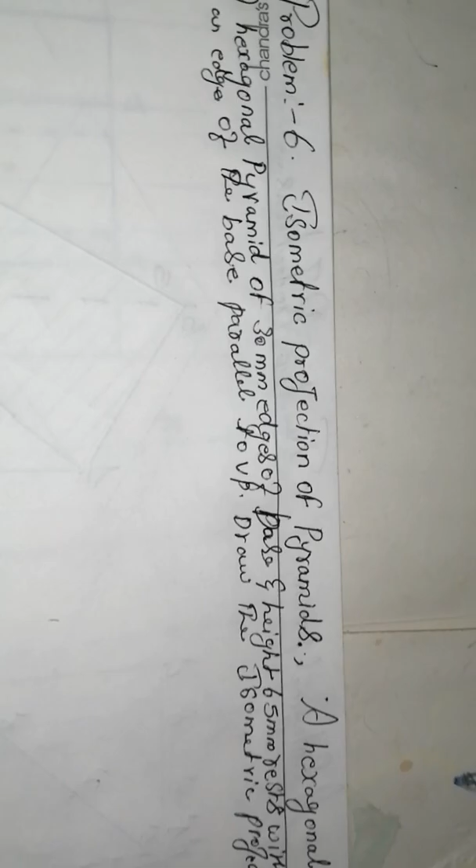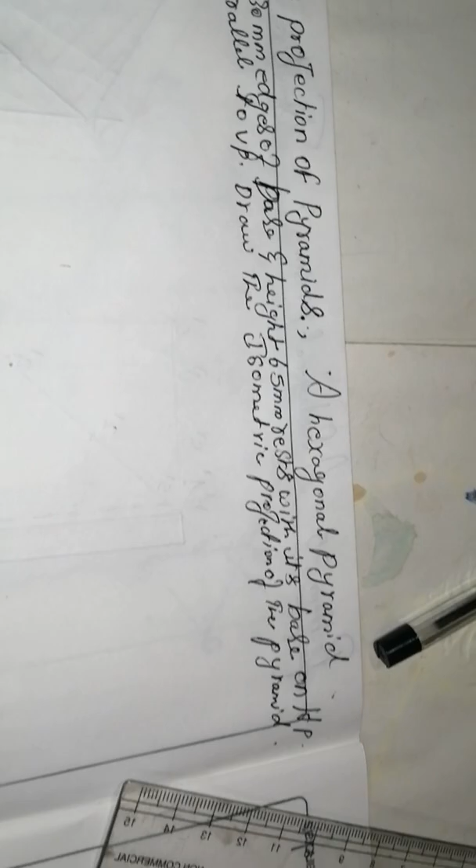So the question has been given like this. We have to do an isometric projection of a pyramid. The question has given a hexagonal pyramid of 30 mm edge of base and height 65 mm, resting with the base on HP and an edge of the base parallel to VP. Draw an isometric projection of the pyramid.

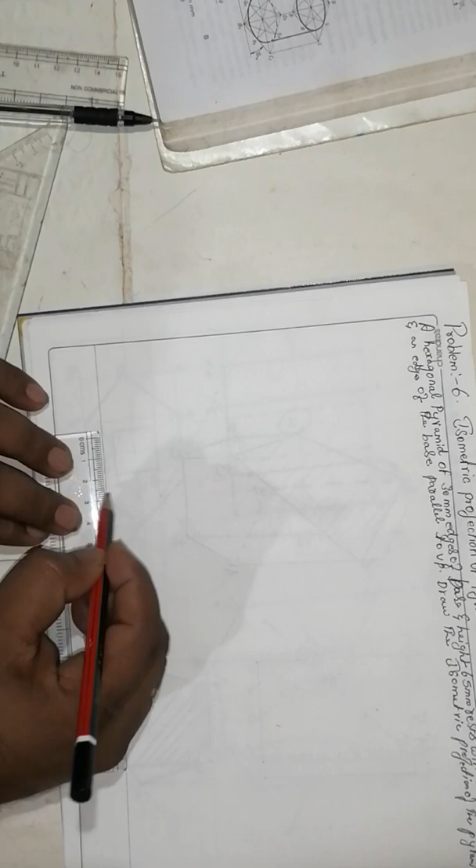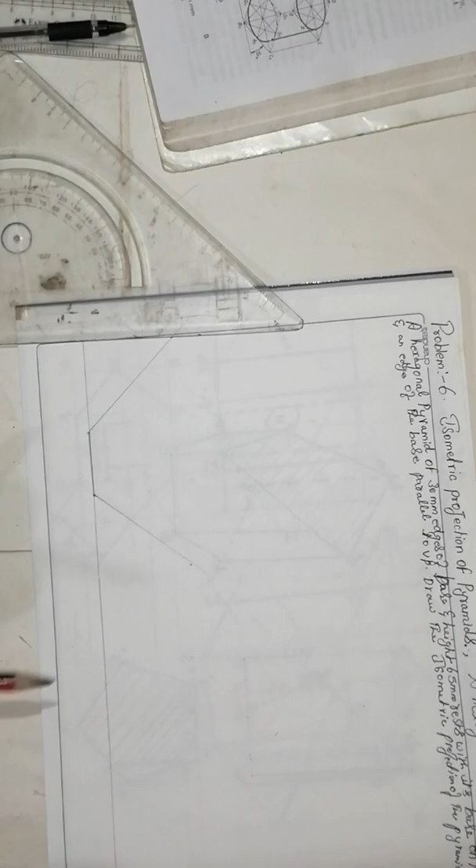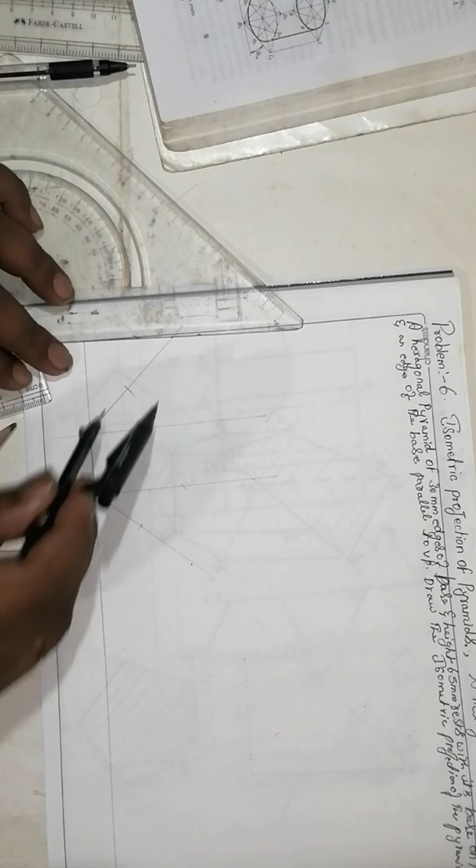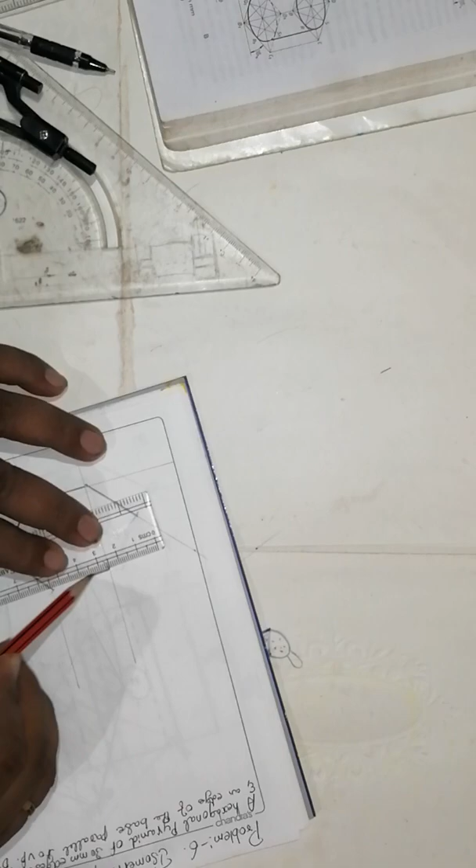So after that, using a compass, cut here 30 mm and cut here 30 mm. Take here, cut here, take here and cut here. So make a hexagonal pyramid so that the pyramid will come like this. So your pyramid will come like this. Then name this part.

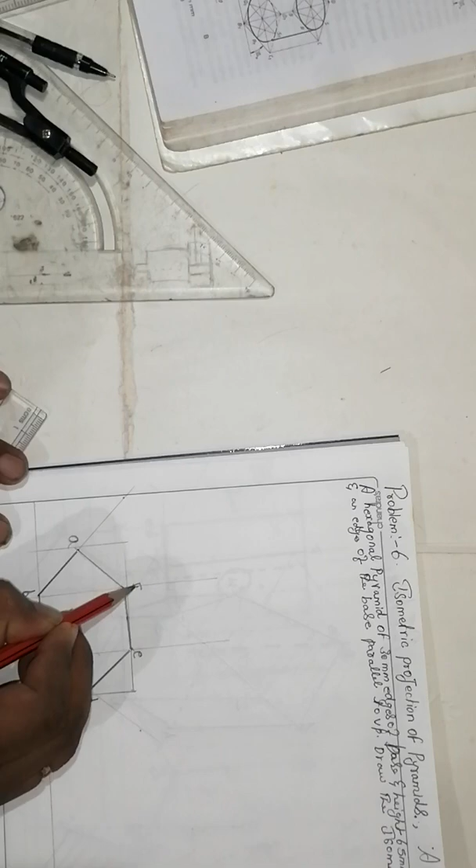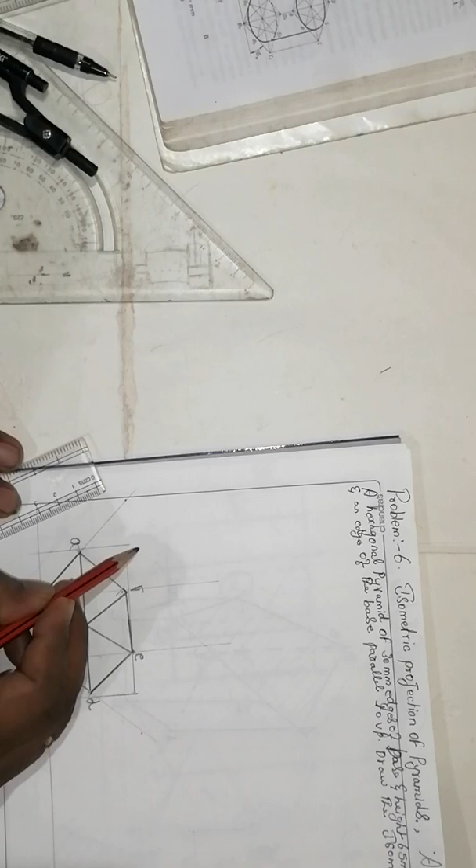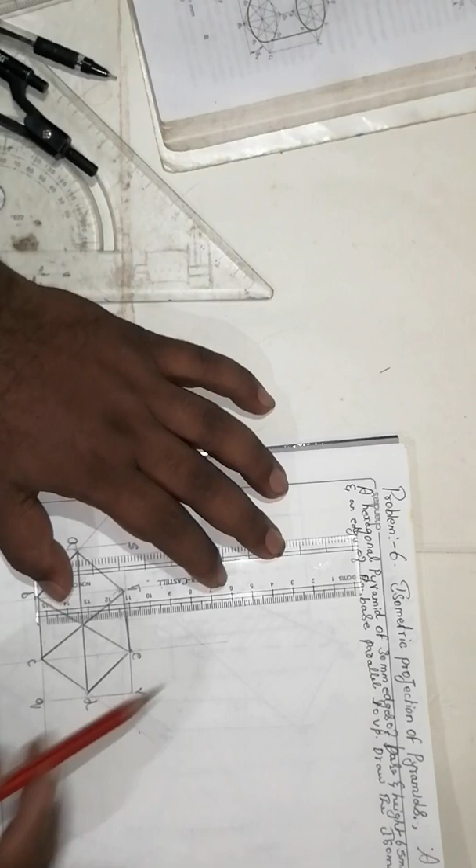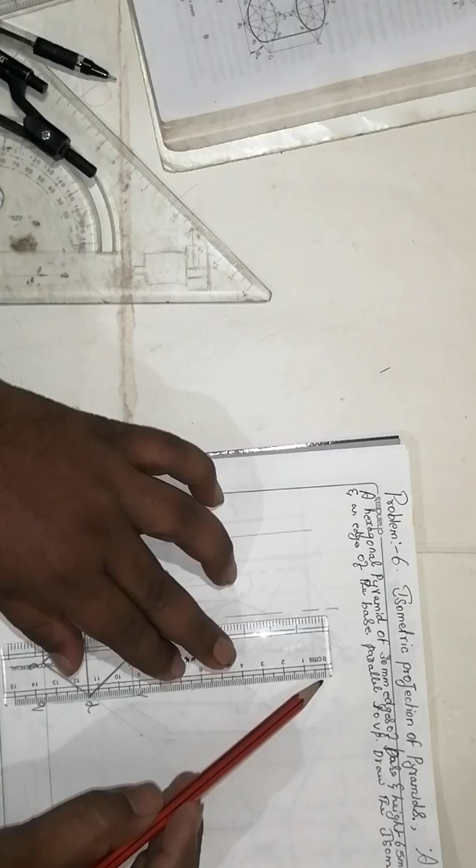This I'll take A, B, C, D, E, F. This I'll take S, P, Q, R. So after that, the center point will be the axis line. Draw a projection line. Okay, after that, this dimension will come here as it is.

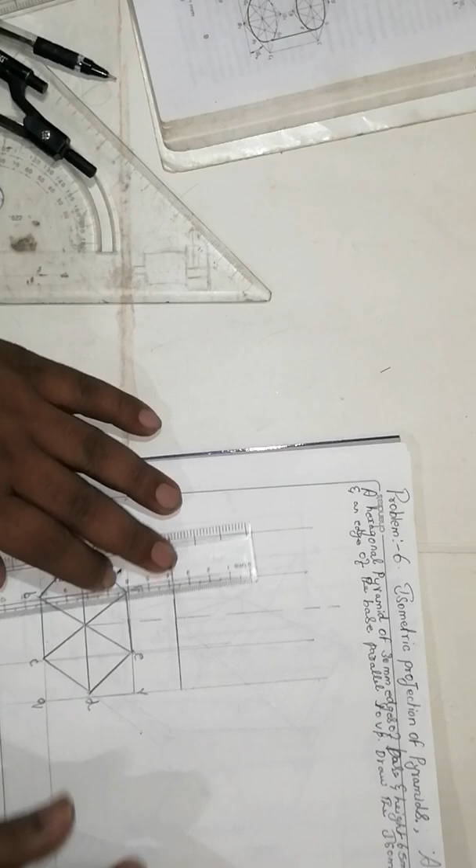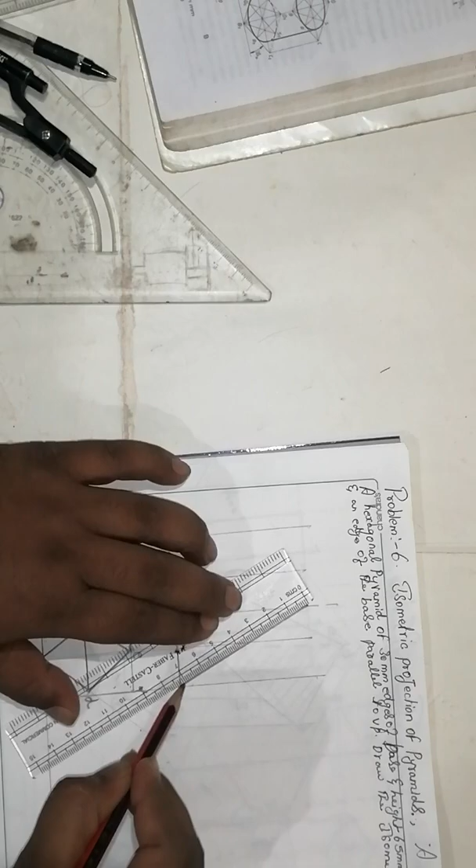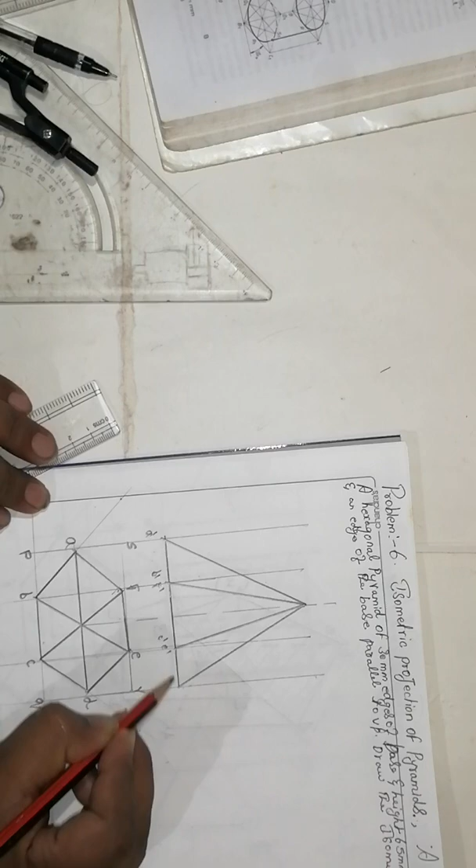Take 65 mm from the question. The base resting on HP and the height is 65 mm. This is going to be A dash, B dash, F dash. This will be C dash, E dash. This will be D dash. This will be O dash. The middle one is O dash O1. After that,

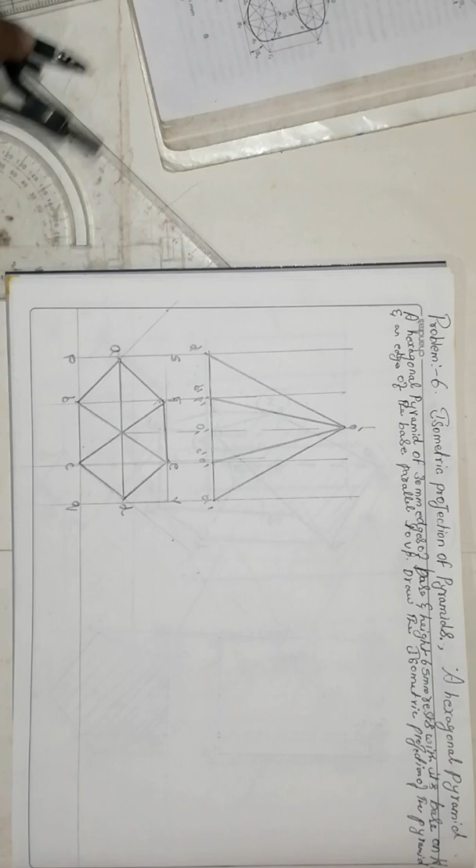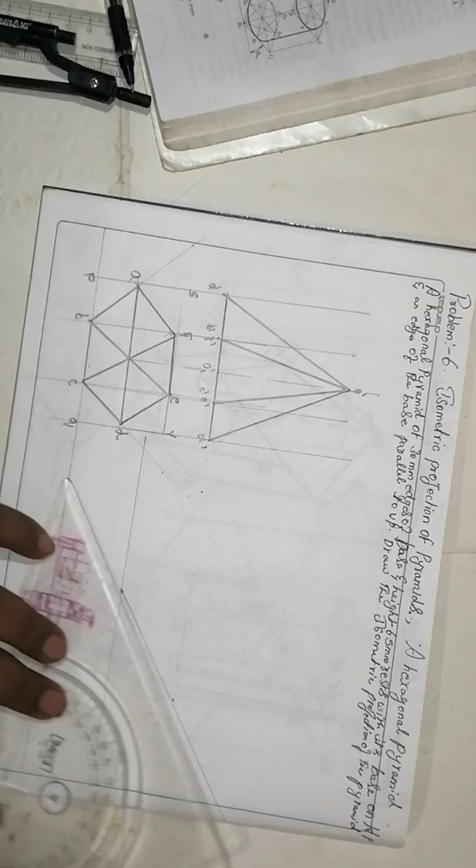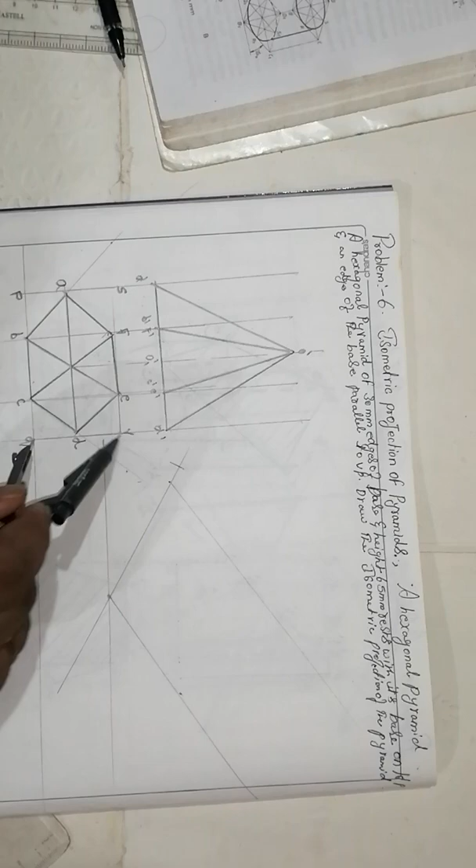take an axis line, keep a middle point, take 30 degree and 30 degree, draw like this, keep a projection line like this. You should take measurement. First you take the total measurement Q to P, cut an arc. Okay, then Q to R, cut an arc.

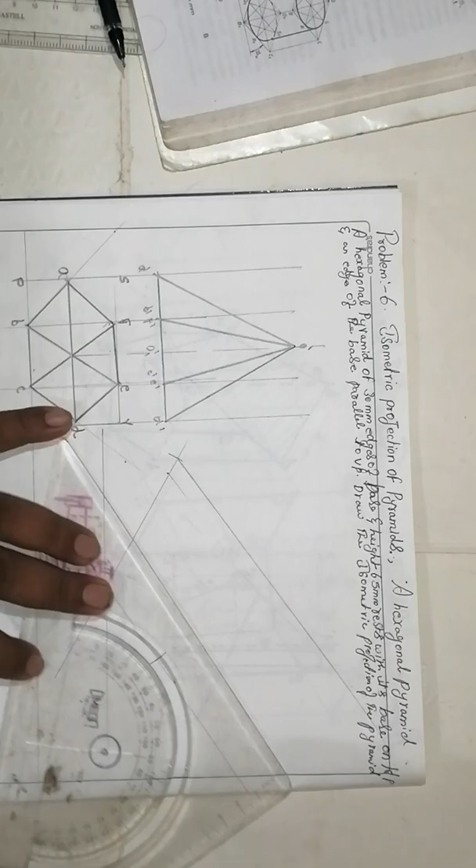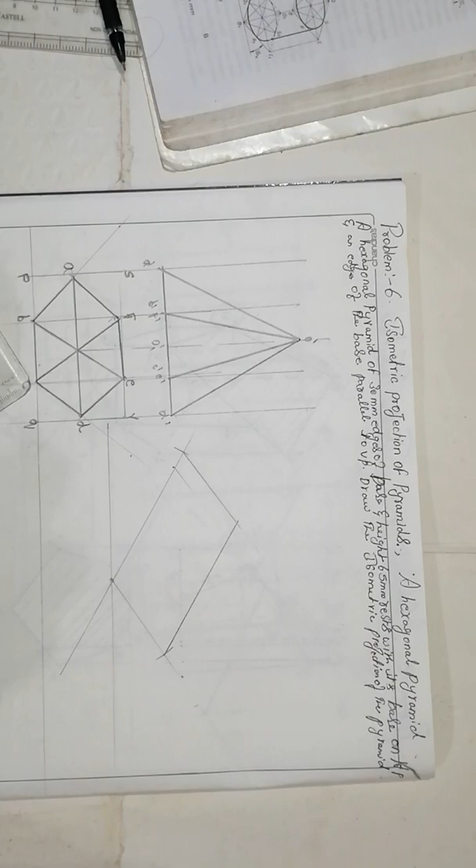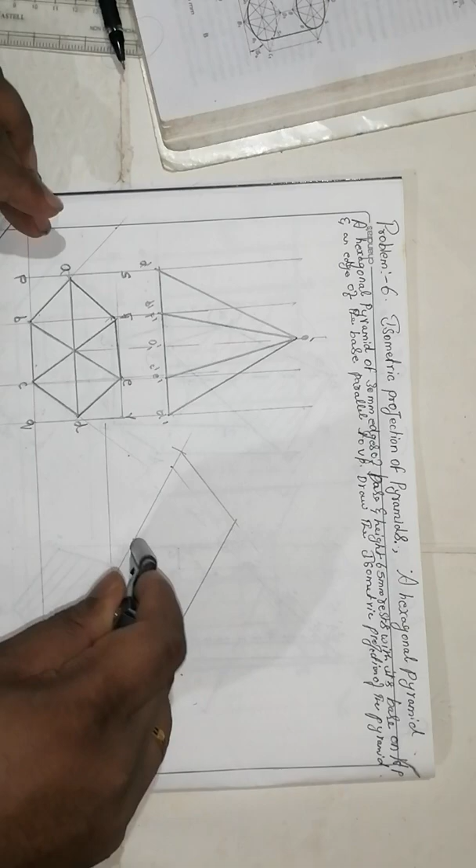Okay, after that keep here, draw a projection line like this. According to the measurement we have to draw. Keep here. It's going to come like this, and take here P to B, cut an arc. Q to B, cut an arc. Cut here, cut here.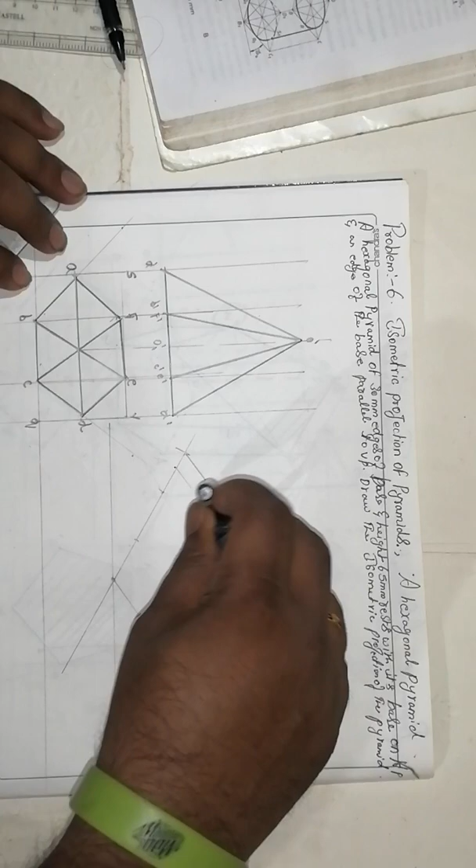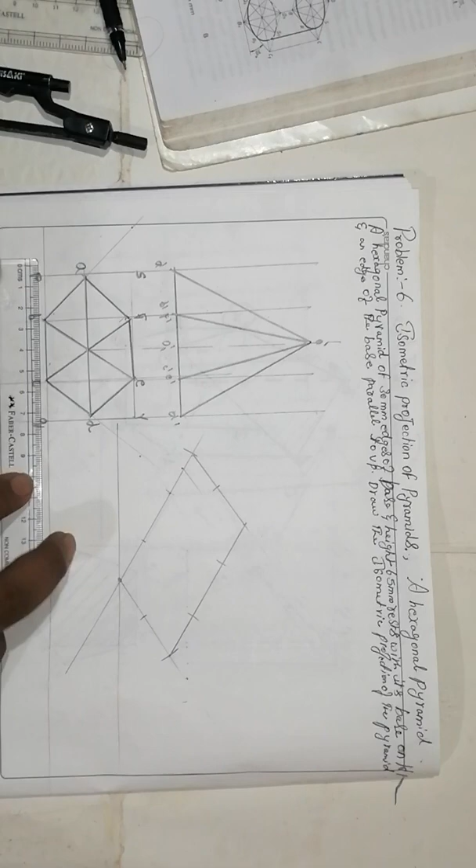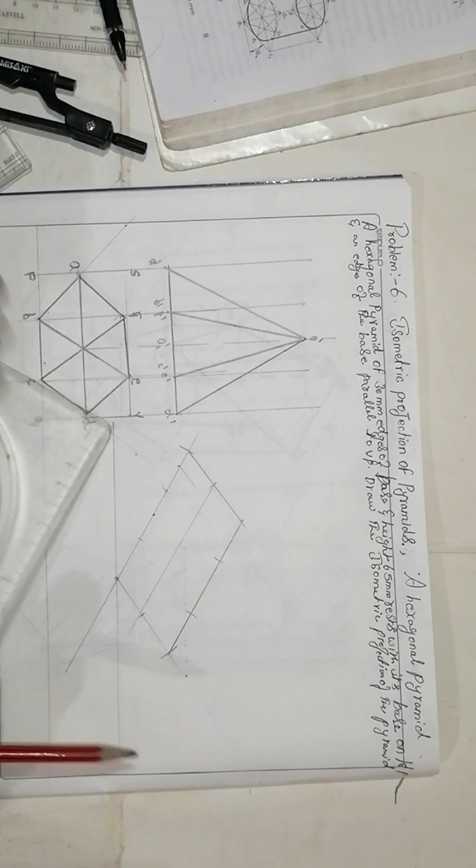So after that, middle point D to R, cut an arc, cut an arc. So see the measurement what has come, 70 mm. This is 70 mm. Take the middle, 35. Keep here 42. Take as the middle. Make an axis line so that you are going to make the isometric projection. It will come like this.

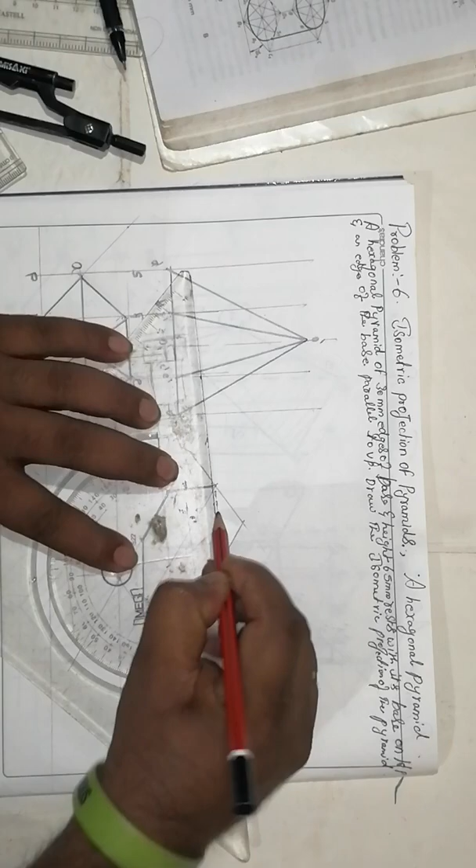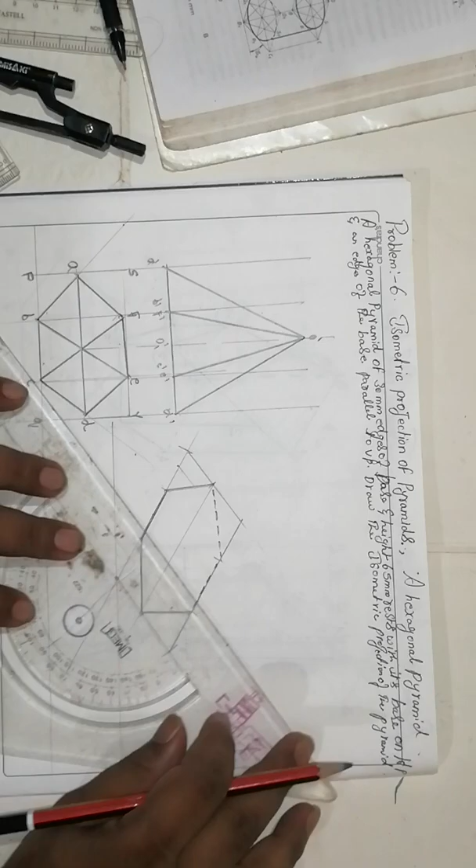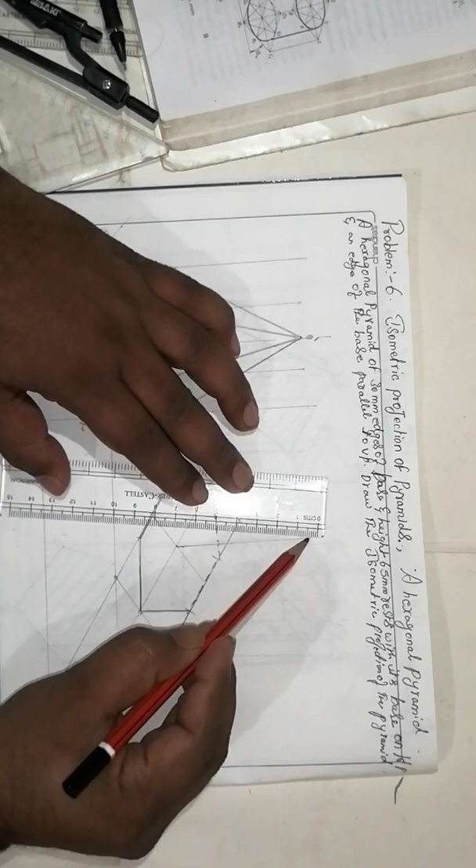Join here, and this will be a dotted line. Okay, this will be a dotted line. From the middle, it comes like this. Using a scale, the length is 65 mm. Draw lightly like that. Take here, join this line, join this line, and join this line, and join this line. It's quite easy and simple. So you will get

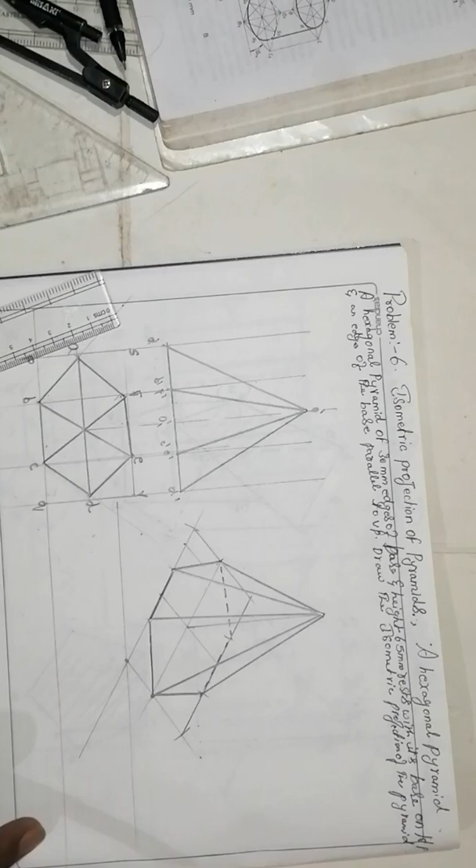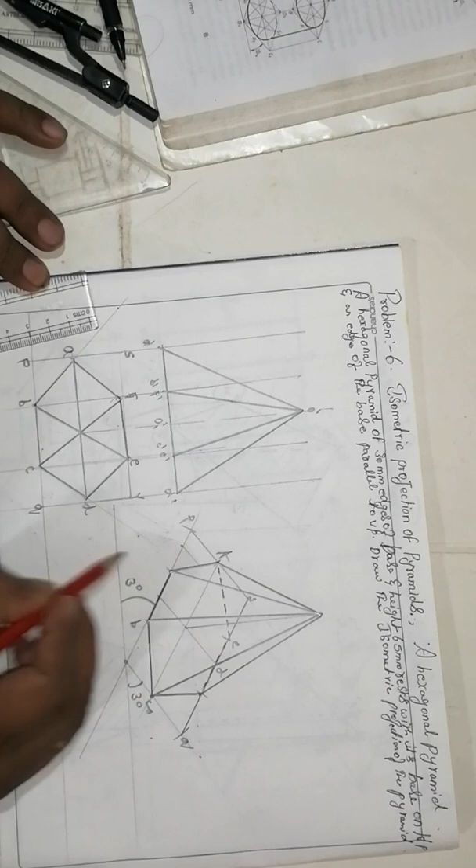the pyramid. So naming the part, this will be 30 degree and 30 degree. So this will be P, A as it is, S, E, D, Q, C, B. So this is the question what they have given.

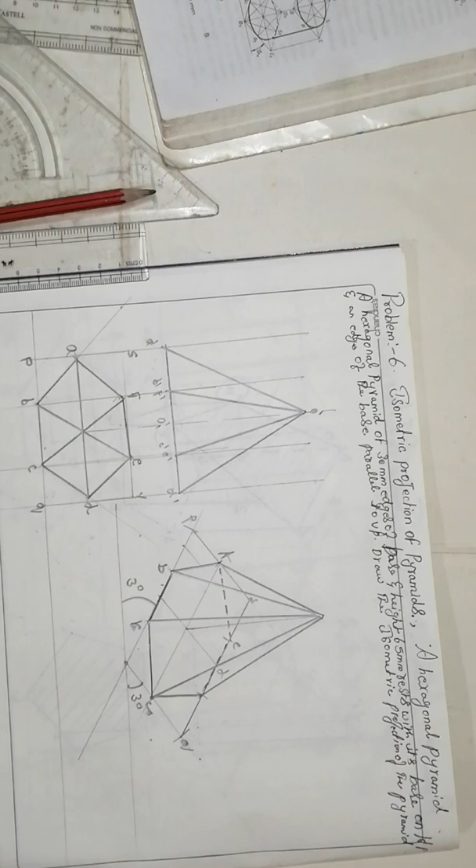So the drawing has come like this; the question they have given like this, so I did it like that.